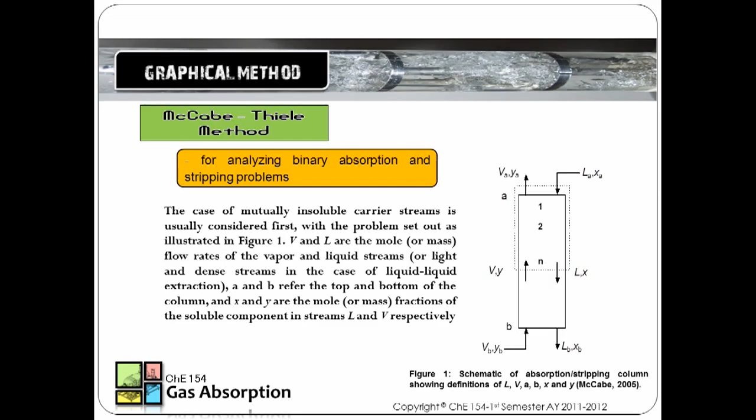So, to elaborate more on the other method for calculations in gas absorption, this is the graphical method. Back in our 152 days, who could forget the McCabe-Thiele method? The McCabe-Thiele method is for analyzing binary absorption and stripping problems.

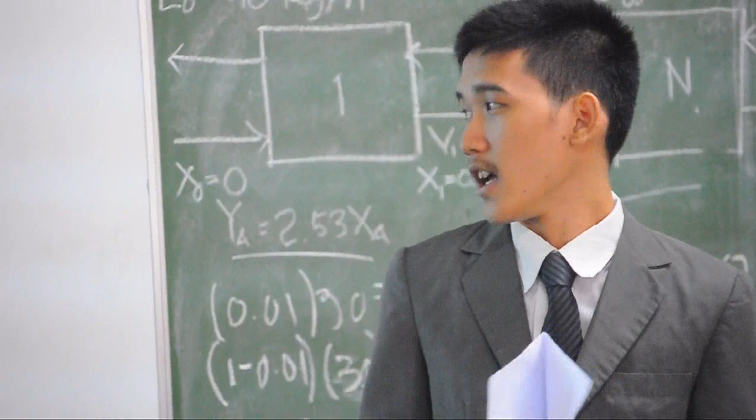In figure 1, this is a schematic diagram of absorption. By the way, stripping is the opposite process of absorption, and absorption is more commonly known as scrubbing. So that opposite is stripping.

The case of mutually insoluble carrier streams is usually considered first, with the problem set out as illustrated in figure 1. So V and L are the mole and mass flow rates of the vapor and liquid, A and B are the top and bottom of the column, and X and Y are the mole and mass fractions.

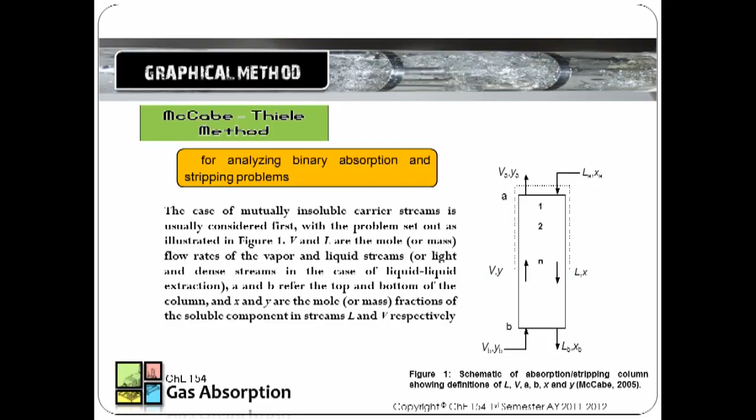To calculate the operating line, it is obtained by performing a material balance around stages 1 to N of the column. We already discussed this earlier, so I'll just emphasize the two cases to compute for the operating line. The formula is: y equals L over V times X, plus YA times VA minus XA times LA, over V.

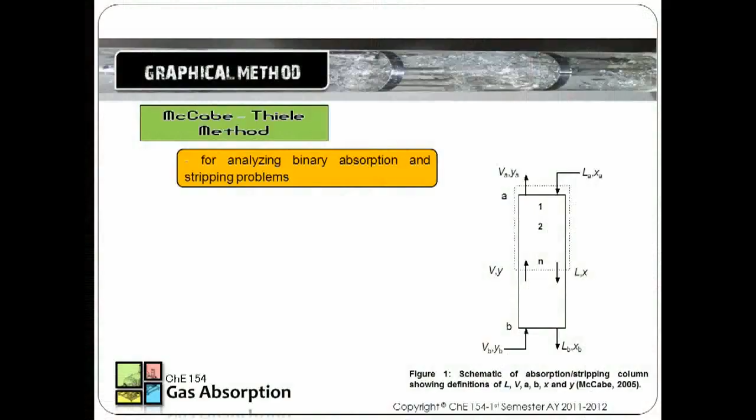In general, the operating line is a curved line. Although for the first case, the lean phase system—what is a lean phase system? It's where the concentration of the soluble component is always less than 10%. So the magnitude of the flow streams L and V are constant, and the operating line can be approximated as a straight line.

After obtaining the operating line, it is necessary to determine the theoretical minimum liquid flow rate, LA min, required in order to achieve a desired separation.

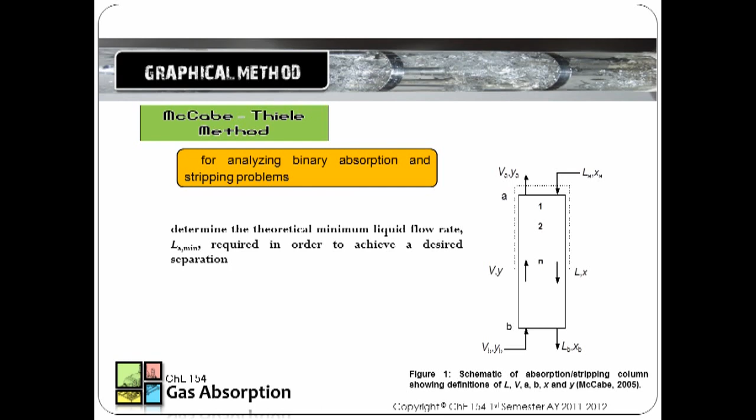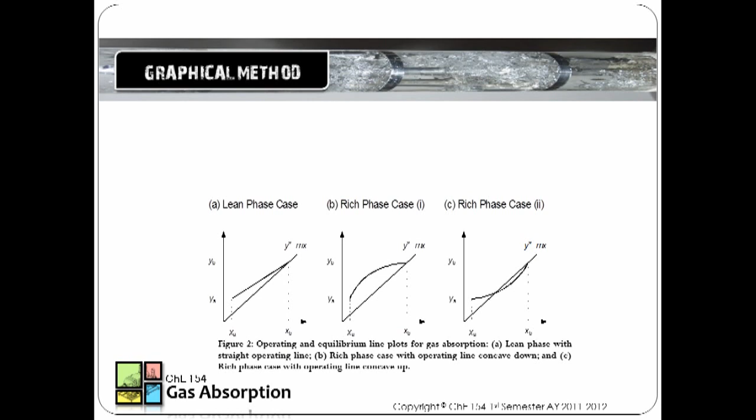Looking at letter B, in the rich phase the operating line is concave down. This is because we will first determine the moles of solute per mole of inert.

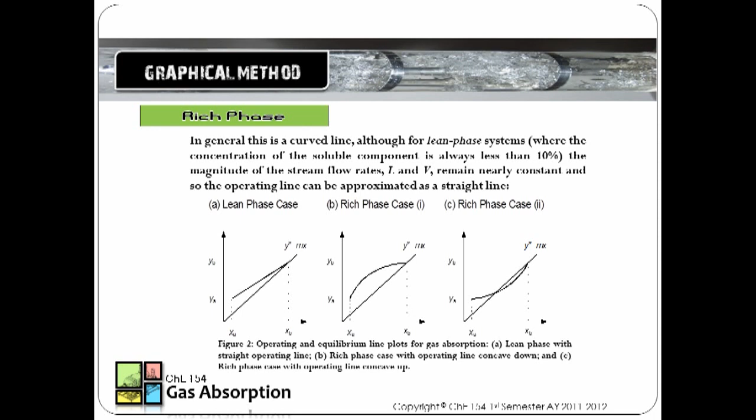In this case, the operating line is concave up, which touches the equilibrium line, the straight line. The main objective there is to determine the end of the equilibrium line—the end of the operating curve should touch the equilibrium line, the straight one. Once it hits that,

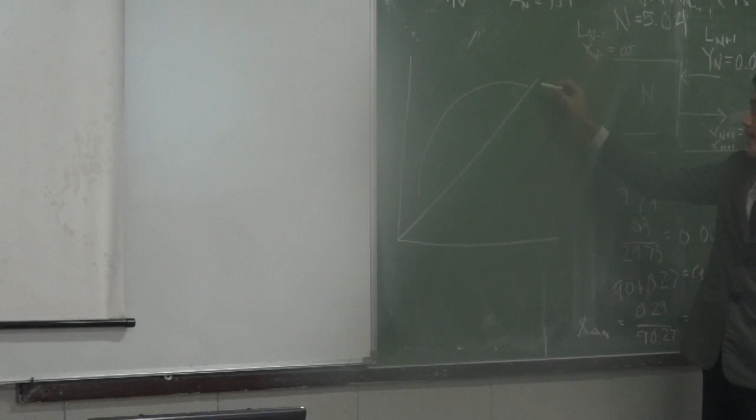recalling our 152 days, getting the number of stages works like this. This is the equilibrium line, and for the rich phase, the usual appearance of the curve is like this. So when the operating line touches the equilibrium line, that's the end of the process, and then you find XA.

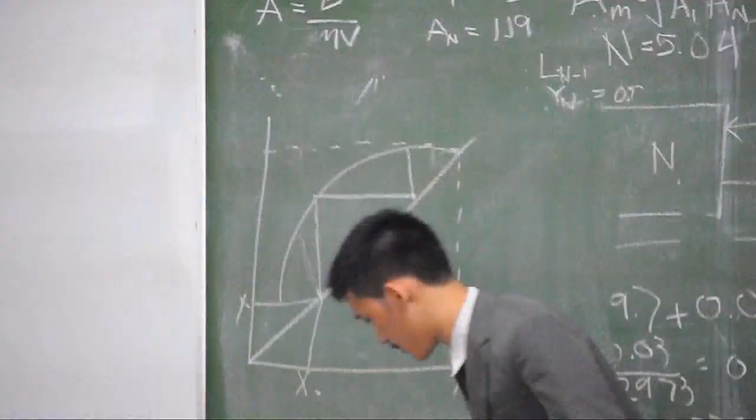Solute A is being absorbed from a gas mixture of A and B in a wetted wall tower, with the liquid flowing as a film downward along the wall. At a certain point in the tower, the bulk concentration YAG equals 0.1. The tower is operating at 298 Kelvin and 101.325 kilopascals, and the equilibrium data are as follows.